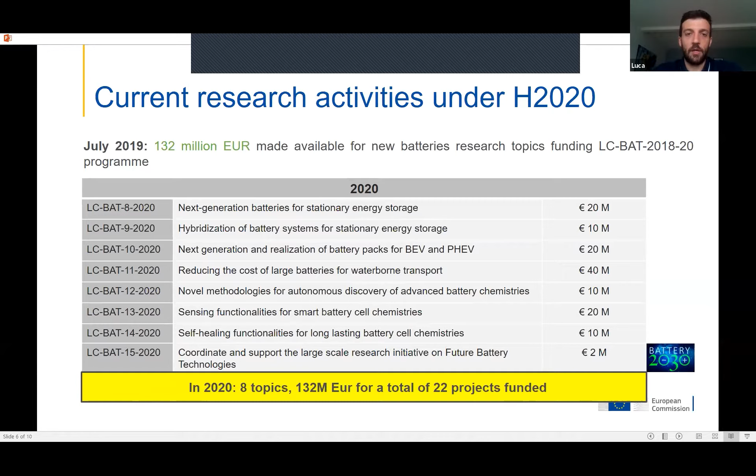I would say the key takeaway of the last three slides that I presented is that since this all started in 2018, as you can see, there has been an increased number of topics available throughout the years, an increased number of projects funded, and also an increased available budget throughout the years. So I would say that this represents the fact that these kinds of research activities have become more and more important. Some specific topics have been allocated, and new activities to research and to agree on these topics, such as the battery partnership, have been set up. And I think these activities are here to stay, and we will see more and more also in the future after 2022.

So now we'll go into the session of the different LC-BAT projects. And our first speaker is my colleague Elisabete Ayerbe, and as I mentioned before, she is the DEFACTO project coordinator. So Eli, whenever you want. Yeah, I hope you can see me and also hear me properly. I hope you can see the slides. Yeah, we can see, Eli. Okay, perfect. Thank you for the introduction, Idoia.

I will talk about the latest results in the DEFACTO project, pursuing accelerated battery developments by means of multiphysics models. But let me first introduce the DEFACTO project. When we talk about DEFACTO, we say that it goes towards digitalization of the lithium-ion battery cell manufacturing plant. And when we mention digitalization, it's an approach, because basically digitalization relies on three main pillars.

The first one is data handling, data storing, data collection, and even data analysis. The other pillar is communication, which deals with the communication between machine and machine, real assets to virtual assets, or aspects of the Internet of Things, device security, and so on. And then the third pillar is modeling.

So we at the DEFACTO project, we are developing models capable to reproduce the manufacturing plant, and we will basically be concentrated on the main steps of the manufacturing: basically on the electrode production, some of the cell assembly dealing with electrolyte filling, and even closing the loop with the aging and performance prediction. So now I will show the latest results.

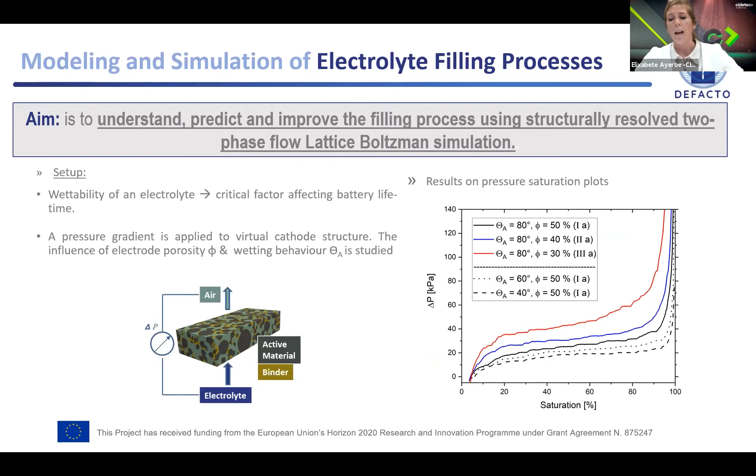Then once the electrolyte filling is done, and we assemble the cell, after the formation step we know that with repeated cycles the cells are degraded. And in particular, in the DEFACTO project, we will be dealing with silicon anodes, in which the silicon undergoes expansion and contraction phenomena, and this might cause stresses and modify the structure of the electrode, causing premature degradation like delamination, cracking, and so on.

So within DEFACTO we will be concentrated on the mechanical properties and how the mechanical degradation is linked to the electrochemical degradation. So basically we solve it from a multi-scale approach, coming from the atomistic, then going through the mesoscale, and then up to the continuum scale. From the atomistic, we get more insight on the mechanical properties of the silicon, depending on the lithiation state. We've also been working on homogenization techniques with the silicon carbon composite material.

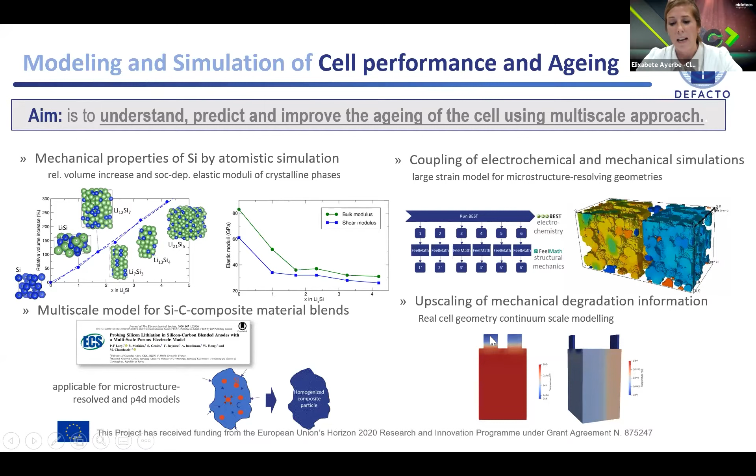And then our colleagues are also coupling electrochemical and mechanical models in order to properly track the impact of the mechanical aspects and the stress on the electrochemical performance. And then we are running continuum scale, large cell scale models as well.

So once we have these continuum scale models, the aim is basically to propose an optimized cell design with these accurate models, and we are even capable to track and correlate these optimum cell design properties with the manufacturing processes. So basically we aim to have these continuum scale models, and considering that they have a very large computational cost, we aim to build reduced order models.

Basically we aim to implement two approaches. The first one is a regression approach, the other one is based on reduced order methods. So with these reduced models, we then implement optimization algorithms and even sensitivity analysis in order to evaluate and anticipate the critical parameters. And then we can explore different configurations of the geometry of the cells and even the cell components.

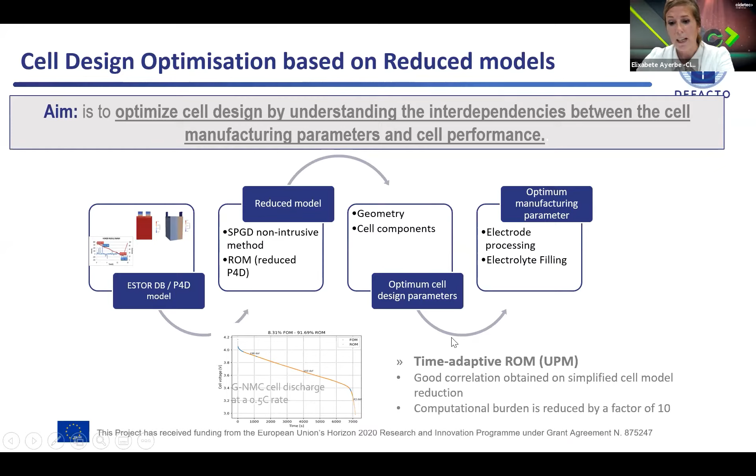So when we do these optimizations, we need to rely on the experimental data, and the experimental data will be obtained within the whole domains, starting from materials, coming to the electrodes, and then going to the cells. So basically, the aim is also to track and characterize the intermediate products along the manufacturing process.

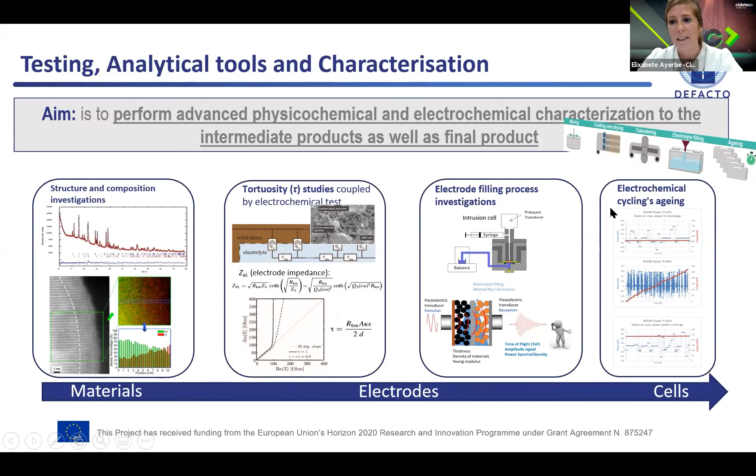So electrochemical test, aging test that will be done to pouch cells, and there will be two kinds of pouch cells. One is coming from the prototype pilot lines, and it's what we call prototype scale cells, and the other one will be manufactured by an industrial partner, and it's a commercial cell, graphite NMC 622. So we will be having a comparison between the two scales, and also we are currently implementing sensors throughout the production line in order to get data monitoring of the manufacturing process.

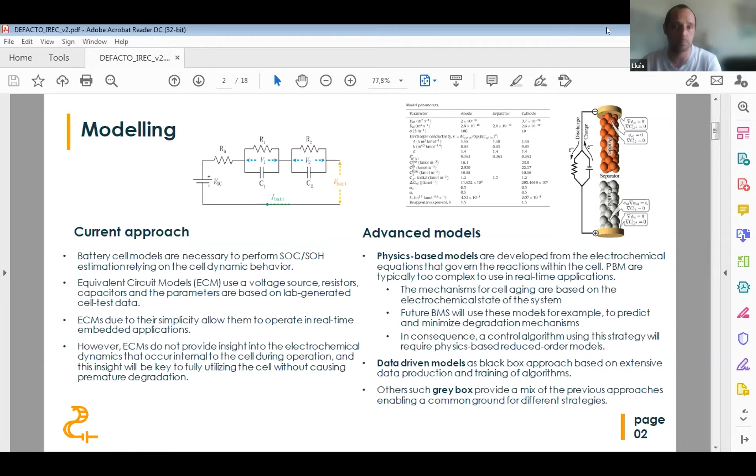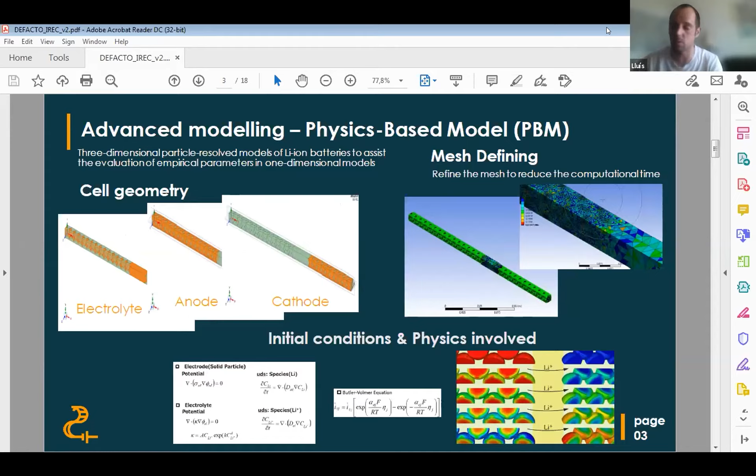In the physics-based model, in the full order model, what we do is define the geometry for the components, the cathode, anode, electrolyte, and so on, then define a meshing, and then we have to put here all the conditions and the physics involved for this exchange of ions. There are some applications like analyzing the aging process, or even reducing the effort in aging tests, optimizing cooling systems, or analyzing these complex phenomena that happen inside of the cell.

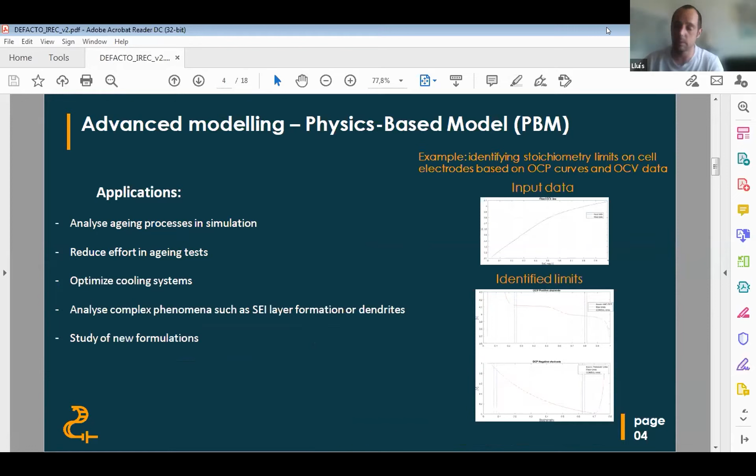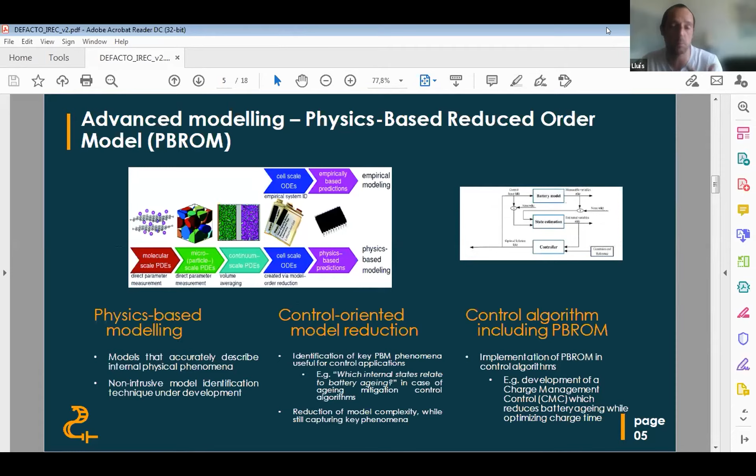But since what we want is to run this kind of model in some embedded system, we have to aim for this reduced order model, where we reduce the complexity of the model but still capture some of these key phenomena. And then we can use these algorithms online, for instance, for a charge management control. During the charging of the battery, we can optimize it by reducing the impact of the degradation of the battery.

Then on the other side, we have a novel amount of sensors that are proposed for batteries. Of course, we have the standards, the voltage, temperature, and current, but there are many others like the strain gauge or the EIS, the electrochemical impedance spectroscopy, pressure, gas detection, humidity, and others; there are many. And also they can be placed on the cell or sometimes inside the cell. There are these two options.

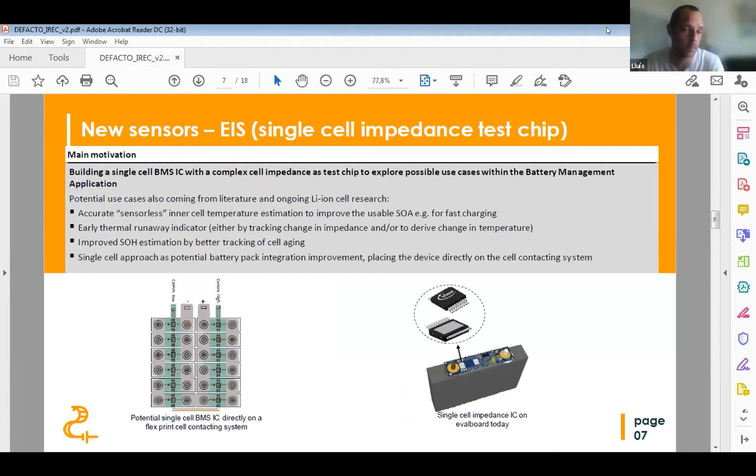Here in the Cobra project, what we are trying is to improve what we call the smart cell functionalities, like providing some sort of small brain to the cell to handle itself and provide useful information for the BMS. So just some examples, for instance, the EIS sensor. It can be used to gather information and estimate the core temperature of the cell. This is very important, for instance, for fast charging strategies. Also, it can detect thermal runaway, so early detection of failures, very important from the safety point of view, but it can also provide information about the state of health.

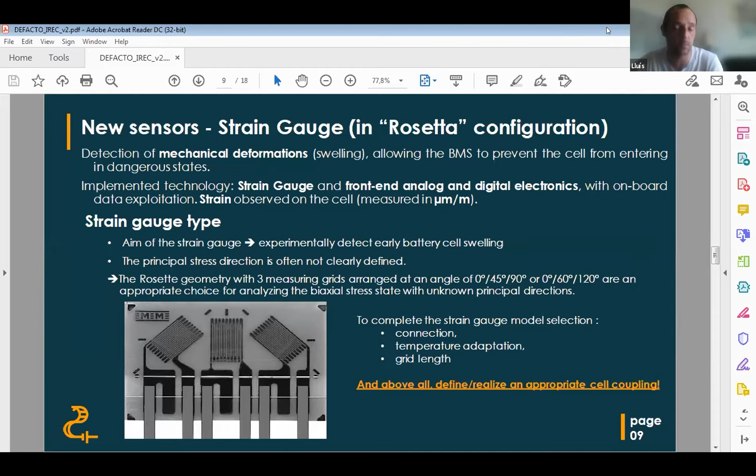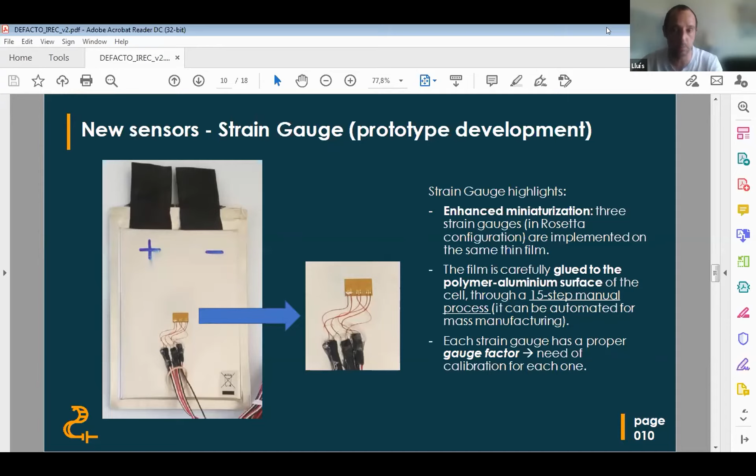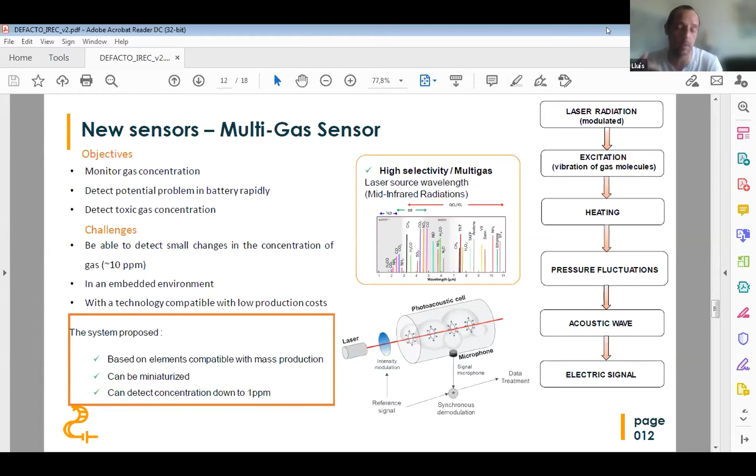We have also a multi-gas sensor, and this is based on laser technology. Depending on the wavelength, it can detect different types of gases. This is important from the safety point of view, because there can be some problem inside the battery if some type of gas is detected. The features we are aiming for are a prototype compatible with mass production that can be miniaturized, very important for the automotive sector, and that is very accurate. In this case, it can detect concentrations down to 1 ppm, so it can trigger an alarm very early before something hazardous happens. Here there's also a picture of the prototype and the development, and the main components are depicted.

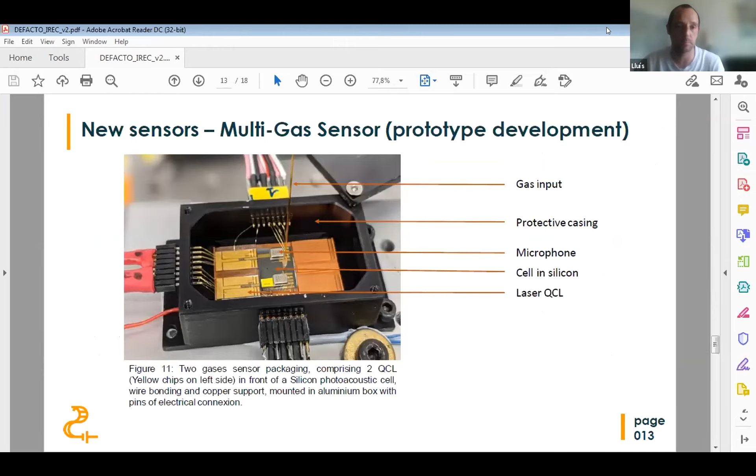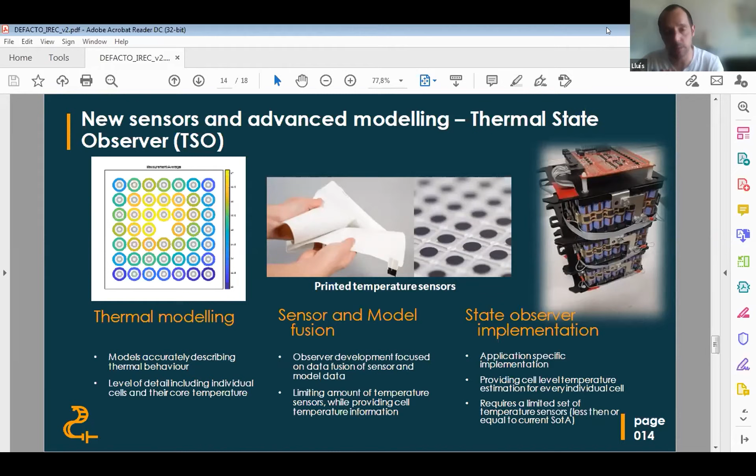And we have here an example of this twofold approach, because we are developing a thermal model of the battery, but also placing temperature sensors at the cell level, and then we can mix this information. In this way, we can have something very accurate, providing information about the temperatures inside the cell and throughout the battery pack. Here are some examples of the application.

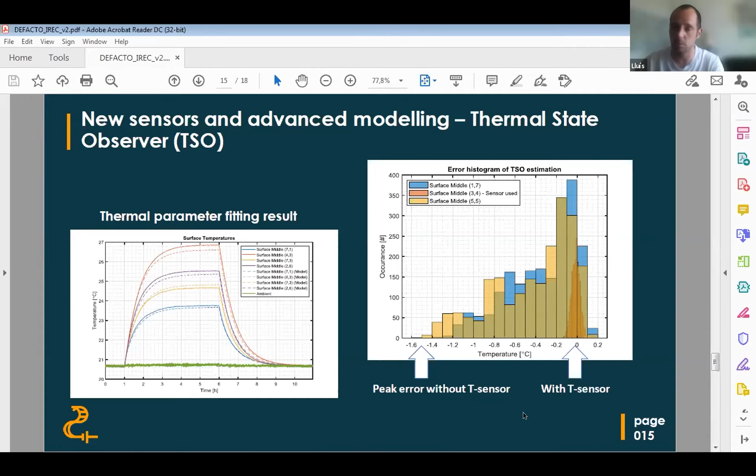You can see on this side here how the error, when you are only using your algorithm and your model, is approximately 1.5 degrees peak error. But when we are mixing the information from the model and from the sensor, the error is 10 times less, and it's nearly zero. So this kind of applications. And just a summary of this twofold approach.

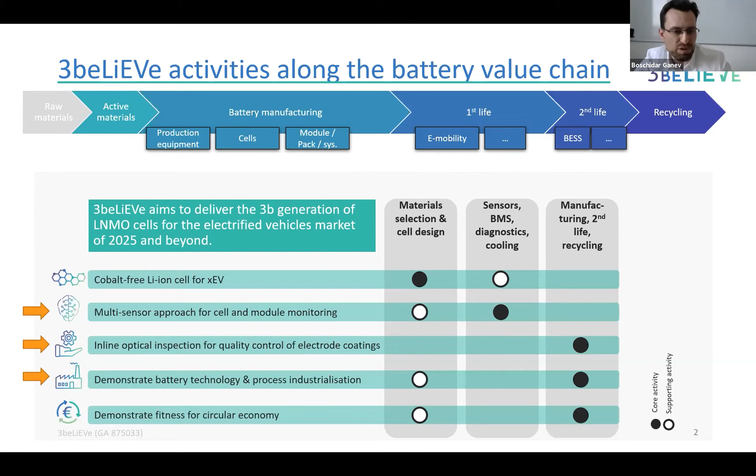And the project also, as mentioned, wants to demonstrate the developed technologies are fit for a circular economy. So we look at aging both in the first life application in vehicle applications, but then also subsequently in a second life stationary application. So while digitalization is not, let's say, the core topic of the project, it is actually a cross-cutting aspect across almost all of these topics. And I just want to touch briefly on 3 of them. So the first on the battery manufacturing level.

So as we know, in the electrode coating process, when it comes to the deposition of the slurry, sometimes it can occur that we have an inhomogeneous deposition of the slurry. So that can lead to coating defects. So that means there can be too little coating in some parts of the electrode or too much material in other parts. And this can manifest as scratches, as pinholes, as cracks, as agglomerations. And the challenge is that both electrodes, the cathode and the anode, are quite dark materials. So the visual inspection is quite difficult, and of course would be very time consuming by eye.

So we can employ here an optical image acquisition process, and the data that can be acquired from this can then be used with machine learning to detect the defects and to classify them by defect type. So what can a system for this look like? So in terms of the system, it's a camera with a set of 4 lights that sits as part of the electrode coating steps.

So after the slurry deposition and the drying process, you have a camera that inspects the coated foil using 4 lights and basically acquires images, and it can compute surface normals and the depth map of the surface. And then, as I showed in the previous slide, detect the various defects. So the aim here is to have this working at higher production speeds and to train the algorithms with the acquired image data to recognize the defects.

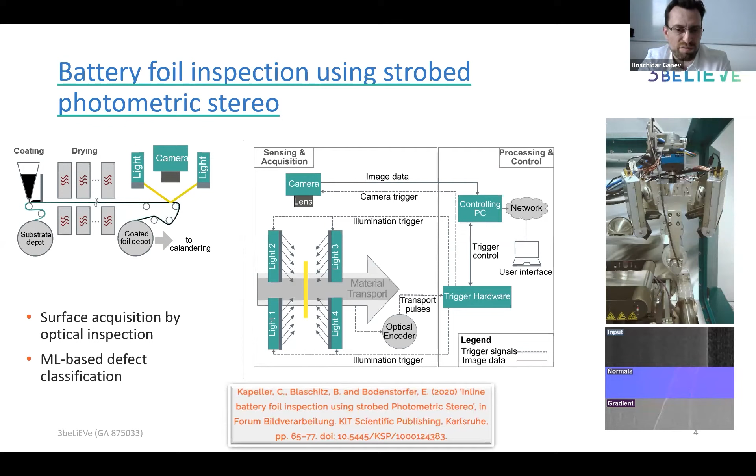Then coming to the multi-sensor approach. So like in Cobra, we also employ multiple sensors that beyond voltage, current, and temperature also do EIS measurements, strain or deformation measurements, and can do gas detection. And the first order of business here was to establish a common communication architecture so that the signals acquired from these sensors can all be relayed via a common data bus to the battery management system. So this is one aspect. The other aspect, of course, is that the open source based foxBMS system had to be updated in order to be able to recognize and process these signals.

The second aspect of digitalization with this is that if we think about the measurements coming from all these sensors, if we think about tracking all the different data points over weeks, months, or even years of lifetime of the battery, of course, a lot of data would accumulate. At the same time, the situation is that usually on BMS, there's only a very limited data storage capacity, and this is typically reserved for safety and for performance metrics. So there's very little space for large volumes of cell cycling operational data. But at the same time, this cell cycling history can be very valuable.

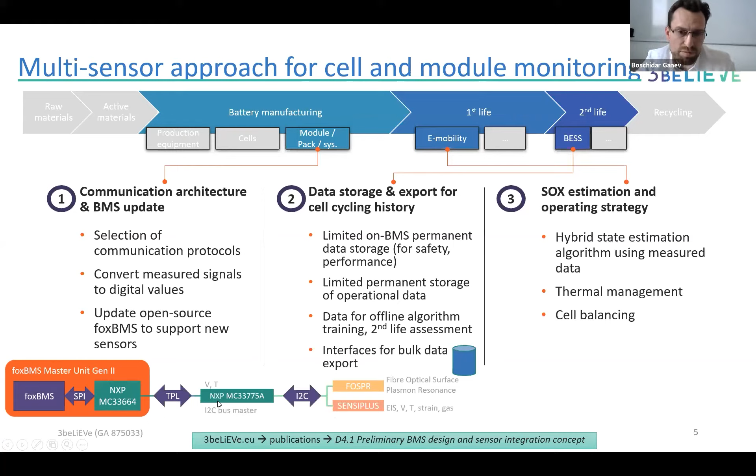The interesting aspect or the takeaway from this is, of course, what questions can be answered with this model. And I've put just a very small subset of the possible questions that could be answered here, but you can think about, okay, what does the layout of the factory need to look like in order to produce a certain volume of cells, modules, or packs? What are the interactions between the different process steps in the production line? How can the material flow be improved? What is the energy use and the corresponding greenhouse gas emissions that result from the production processes? What happens if some of the equipment fails? How much waste output is there in terms of scrap? And so on and so forth. So there's a large list of interesting questions that could be analyzed with a detailed manufacturing process that's modeled.

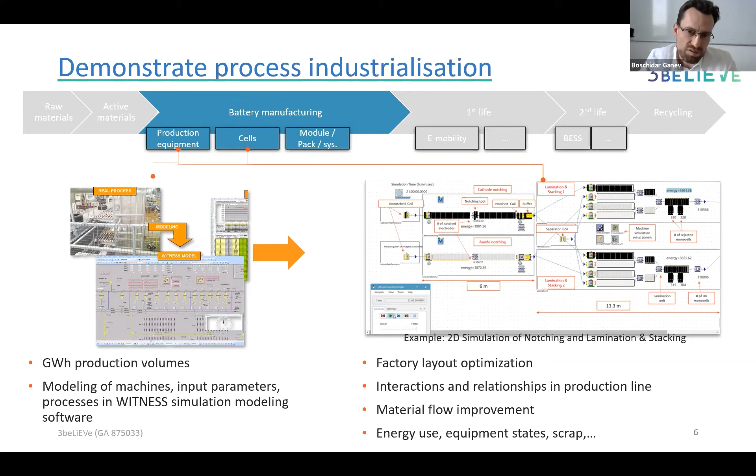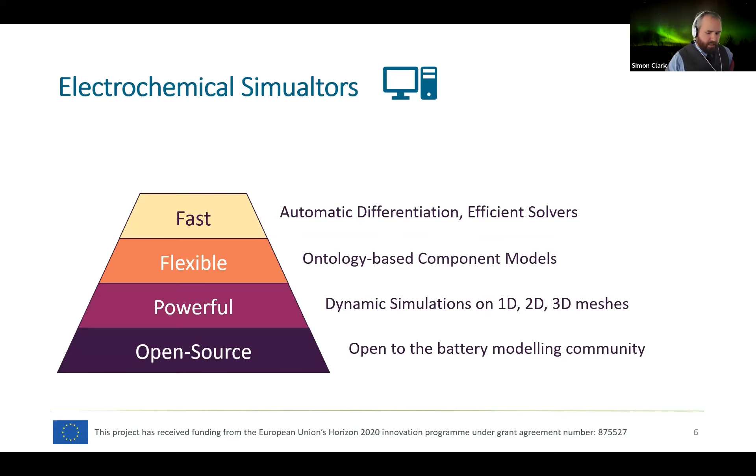It needs to be flexible, so we can minimize the amount of new coding that's necessary if we want to introduce a new feature or design a new system. And we can do that by building on our ontology-based component models. And it needs to be fast, right? We're very impatient people, everybody, and we need models that give us results quickly and can be integrated into real-time simulation workflows. And we can do that by leveraging automatic differentiation and efficient numerical solvers. In Hydra, we're bringing all of this together in an open source battery modeling platform that we call BattMo.

So what is BattMo? BattMo is a finite volume continuum modeling framework for electrochemical devices. So for those of you with a background in the field, it's capable of solving P2D, P3D, P4D models. It's electrochemistry neutral. So of course in Hydra, we're focused on the development of lithium-ion battery models for generation 3B materials and components, but we're not limited to just that. BattMo is flexible and can model post-lithium-ion systems as well as even hydrogen and electrolyzer systems.

BattMo is currently implemented with custom solvers in MATLAB to enable it to be very fast and efficient. And we plan to make it even faster by creating an implementation in the open source language Julia. So this is planned for release in summer 2021. When it's available, you can find out more about it at batterymodel.com.

So moving forward, I'd like to highlight the experimental database section, starting with a quote. "Data, data, data," he cried impatiently. "I can't make bricks without clay." And who said this? It could be a frustrated PhD student. It could be the PI bursting into your lab. But this was Sherlock Holmes 130 years ago. How little the world has changed. And in Hydra, of course, and in battery digitalization generally, this is true. We need data, data, data.

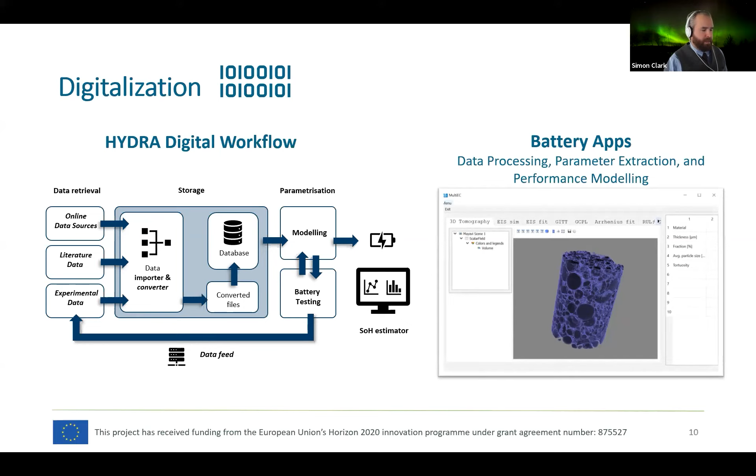So just to summarize, battery design requires knowledge, models, and experiments, and digitalization enables the efficient exchange of information in the design process. In our project, knowledge is formalized in an ontology. The modeling ontology is used as a foundation for a flexible, powerful modeling framework. And the characterization ontology is used to ensure the interoperability of experimental data. Data exchange and operations are described in experimental workflows, and within Hydra, we're developing user-friendly battery apps to help make this as accessible and useful to the battery community as possible.

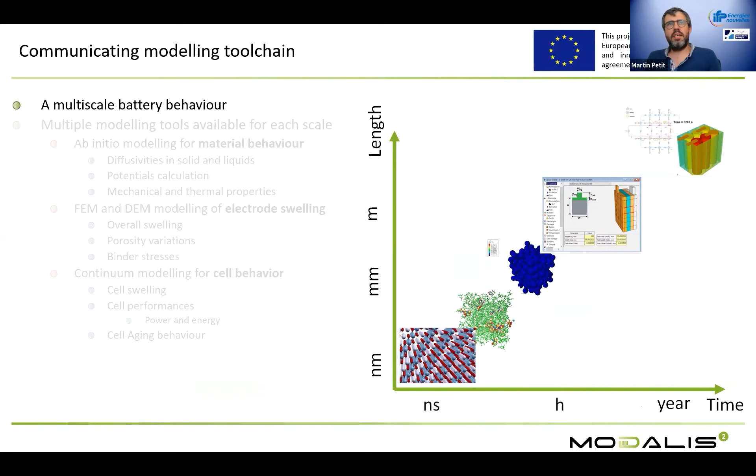One of the main issues that we have regarding modeling in batteries is that we are facing a multi-scale behavior, as you know, from the material scale to the global system, and multiple modeling tools are available for each scale. Ab initio modeling is used in order to get the behavior of the material, especially diffusivities, potentials, mechanical properties. Specific mechanical modeling is also of use at the mesoscale or microstructure scale for the overall swelling of the electrodes, the porosity variations, some stresses on the binder.

And one of the main objectives is to get the complete cell behavior that we get at the continuum modeling scale. And we are aiming in MODALIS² to get from this modeling scale the cell swelling, the cell performances in terms of power and energy, and cell aging behavior.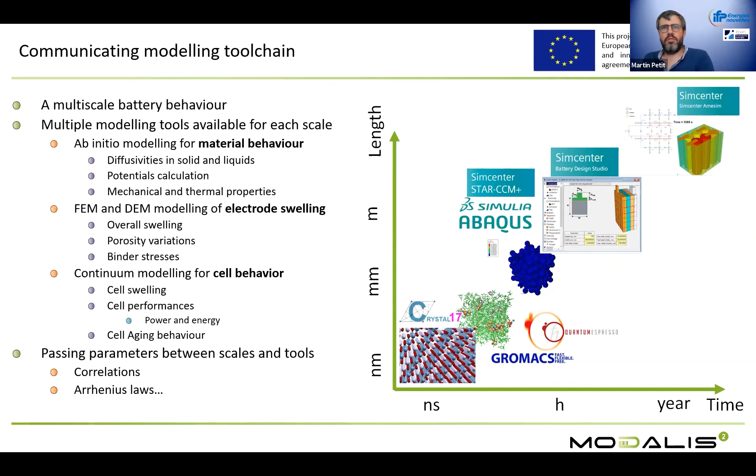So the aim of MODALIS² is to create ways of passing parameters between these scales and tools in order to be able, from a modification at the material level, to understand the global behavior of the cell at the system level, thanks to correlations, Arrhenius laws, and so on, but from the lower scale calculations.

In parallel, for all these dedicated modeling approaches, a dedicated experimental campaign is made thanks to devices and facilities that we have in the consortium, as we need dedicated experiments for model calibration and also model validation. This will be done at the same scale as the modeling. That means material scale characterization with microscopy, XRD, granulometry, and so on.

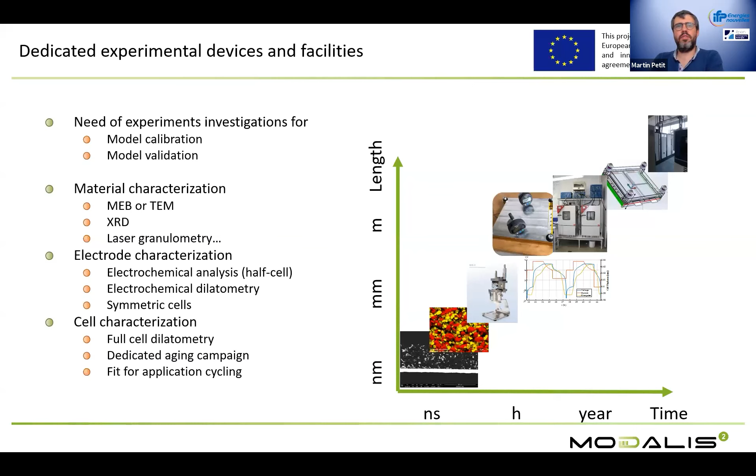Then from the microstructure, we have dedicated electrode characterization with electrochemical analysis, electrochemical dilatometry, symmetric cells for the behavior of the electrolyte. And then we have also developed some dedicated full-scale characterization in order to study the swelling of the full cell with the full cell dilatometer, and a dedicated aging campaign in order to analyze the aging of the cell. And in this aging campaign, we will have some dedicated tests fit for the final application, that is the automotive application.

So as I said earlier, this modeling toolchain is to be developed especially for new battery technologies. There are already a lot of modeling developments that have been done for classical Gen 3 batteries. But in this project, we want to focus on next generation batteries, especially high content of silicon for the anode in the Gen 3B cells. So as we know, in this case, we will have a higher specific energy, but also a higher mechanical degradation of this electrode due to the behavior of the silicon.

So in order to characterize and to analyze this behavior, we will have some ab initio modeling of the material properties in order to get the thermodynamic properties of the silicon oxide of our material for the negative electrode, the thermal and mechanical properties of the silicon oxide, and the transfer properties in the liquid electrolyte, as well as the active material.

Then, thanks to this data, we'll be able to perform a mechanical modeling of the negative electrode, giving the swelling of the electrode as a function of state of charge, of C rate, and of the constraint on the electrode. And finally, apply these two lower level modelings to the continuum modeling in order to assess the performance of the cell.

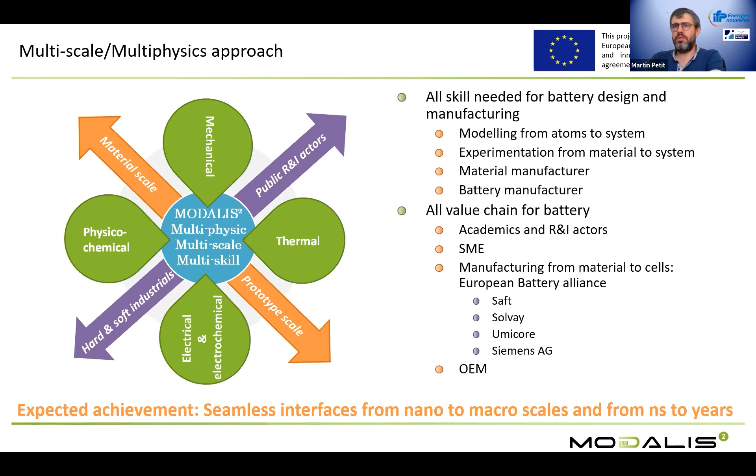So I will describe to you now the main use cases that we want to create during this project in order to demonstrate the possibility of the modeling toolchain. And the first end users are the material manufacturers.

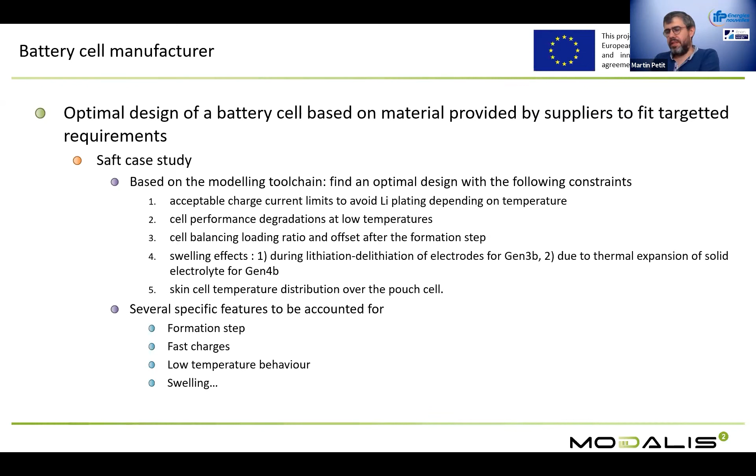Using the battery modeling toolchain, they will be able to assess the cell behavior and especially provide the end users, the car manufacturer, for instance, with control laws for the batteries without any experimental campaign. And then the last end user is the OEM, and especially CRF.

They would like to use this toolchain in order to study the effects of mechanical properties using quantum mechanics, and also apply this to specific automotive application duty cycles in order to investigate the cell aging in continuum modeling.

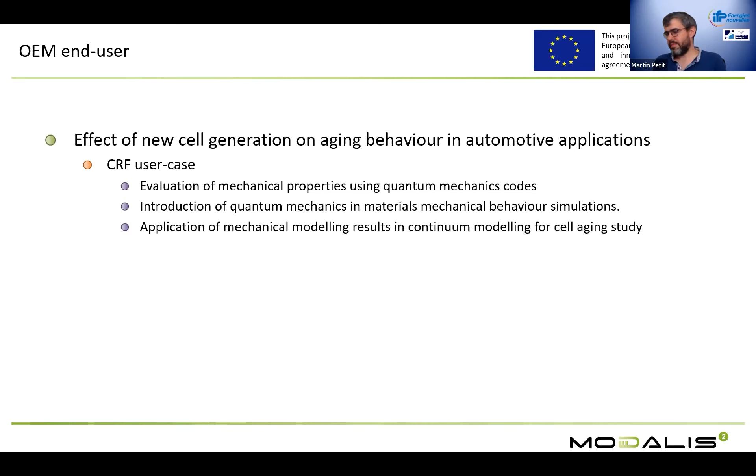So at the moment, we have initiated the development of the toolchain, especially for Gen3B. Ab initio modeling is being performed in order to assess the behavior of positive and negative materials. We are also performing mechanical modeling with FEM and DEM codes in order to simulate the microstructure during charges with high content silicon. And we have developed a framework for the Gen3B battery modeling, taking into account aging, diffusion-induced stresses, and cell swelling.

So at the moment, we are just beginning the work on Gen4, but we will prepare a first set of parameters in order to model the electrolytes that are foreseen in the project. And the next step is to perform these experiments on Gen3B cells in order to feed our models and calibrate and validate the model based on the experimental data.

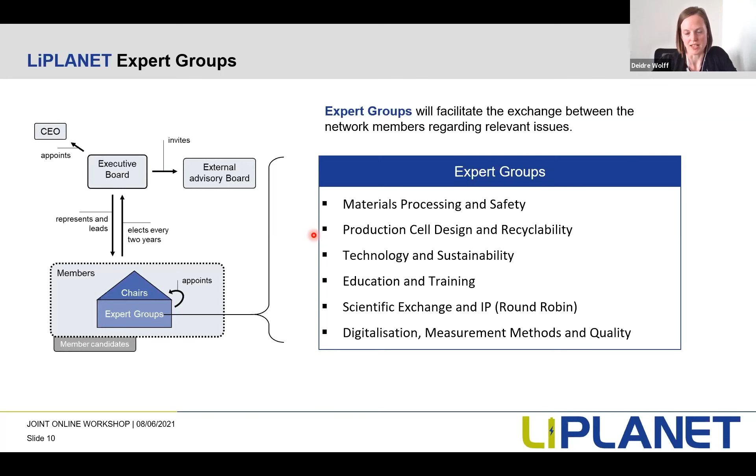And we currently have 6 expert groups: materials, processing and safety; production, cell design and recyclability; technology and sustainability; education and training; scientific exchange and IP; as well as digitalization, measurement methods, and quality. So we have had already our first initial expert group meetings where the expert group members have elected an expert group chair for each of the 6 different groups that can be seen here.

And just to focus on digitalization, within these expert groups, we will have crossover between some of the topics that are worked on. However, we also have an expert group that works specifically on digitalization, measurement methods, and quality. And within this expert group, some of the subtopics that will be worked on are, for example, modeling (physics-based, multi-scale, multi-physics, and cyber-physical), machine learning tools, standardization of APIs or data standardization, quality control, and inline measurements.

So another aspect that is currently being worked on within the LiPLANET project in regards to digitalization is training that is being developed on the benefits and challenges of digitalization in battery production. This will be organized as a workshop where cyber-physical production systems, data acquisition and management, data analytics and data mining, decision support, and some use cases are topics that will be discussed. This is currently in a very early development stage, and more information on this will be available within the upcoming month.